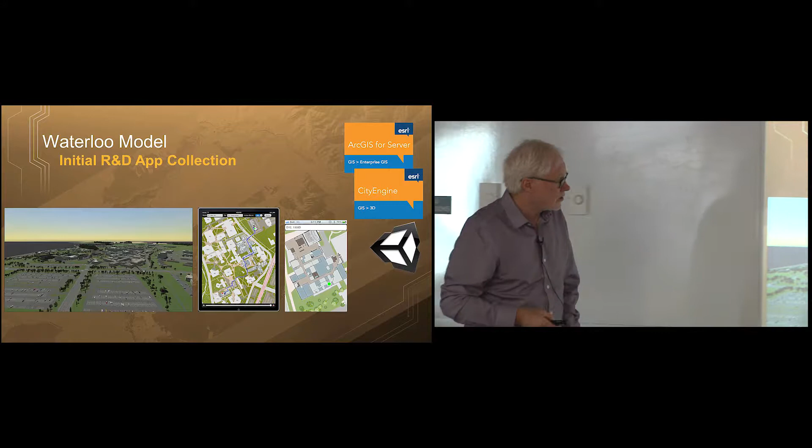So we started to experiment with CityEngine, and we've integrated it with Unity. Before we get to the York model, I just want to show you very quickly a couple of examples of some of the work we did at the University of Waterloo.

On your right over here is a native iOS application written in Objective-C that allows a user with the University of Waterloo's campus to find a room on campus. It's a very simple app - you enter a room number, the app goes off to a server-based service that identifies the location of the room that's coded into each of the floors, which are raster scanned images for every building on campus, and it shows you the location of the room and tells you exactly which building it's in, allowing you to navigate without any routing information fairly quickly. Going beyond just simply finding rooms, you need to know how to get there.

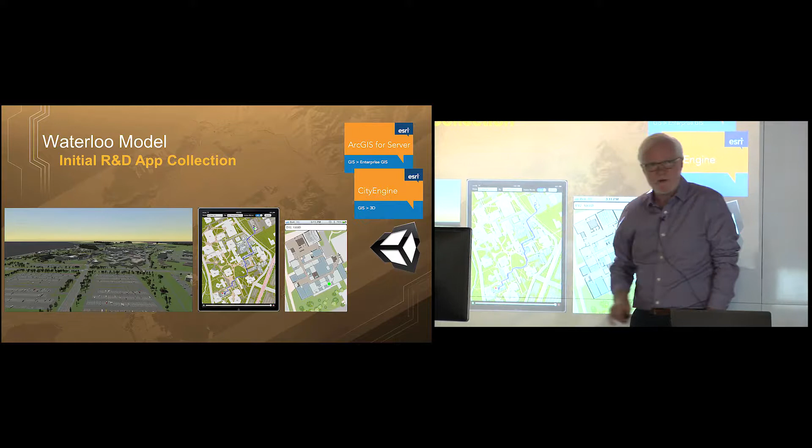So we wrote a second app that allows you to navigate—again, a native iOS app that could easily be rewritten in Java for Android devices. It takes you from the point that you start at to the point you want to get to, using both 2- and 3-dimensional routing to get there.

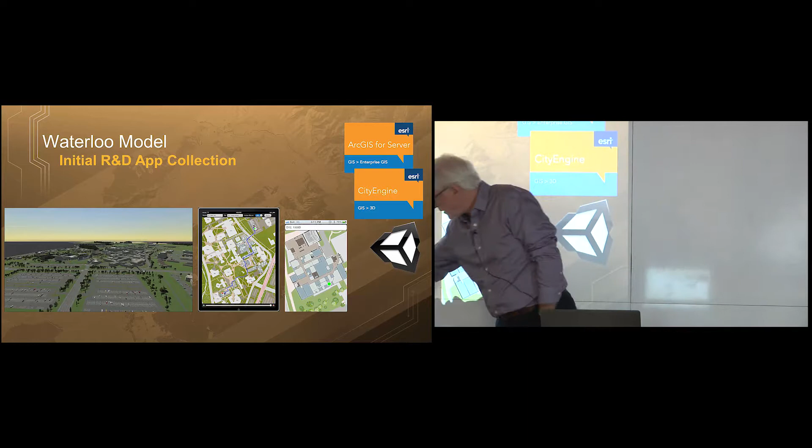So if you have to navigate between floors of a building like this, if we were starting in this room, the route would go out the door to the elevator, we'd go down in the elevator, and as we move between floors the floor plan would change according to the level we're on. Then we can navigate the path with the slider at the bottom of the device that gives us information about where we go next.

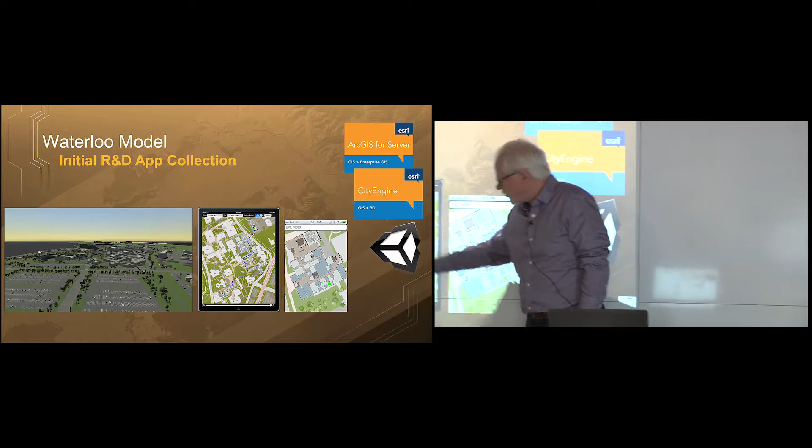And we can also set this route so that it optimizes the amount of indoor navigation we have to do if it's cold in the winter—we don't want to go outside, so we can use tunnels. Or if we want to have a nice walk, we can set it to go outdoors.

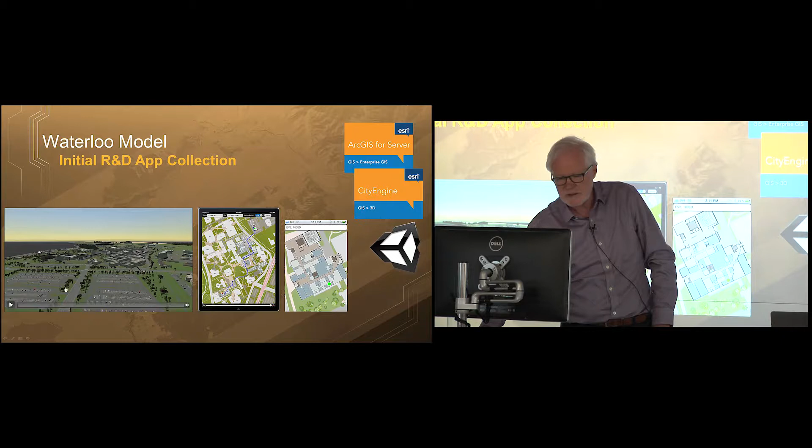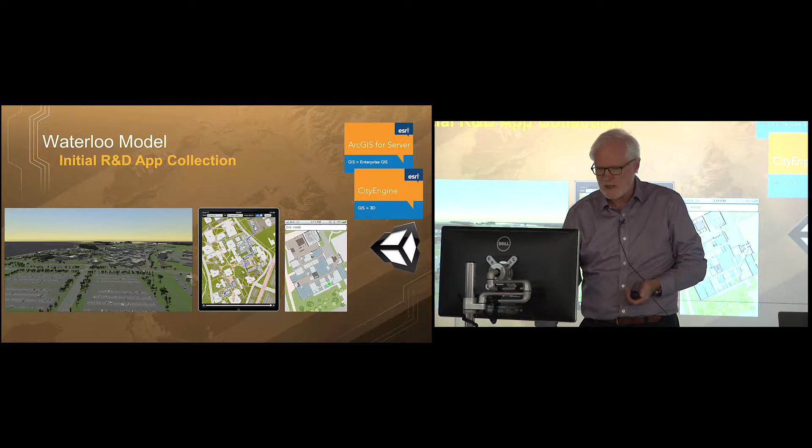And this takes you on an immersive walk through the campus during the day and at night, so you can see how we can modify interior environments in terms of lighting, and also outdoor lighting as somebody navigates around the campus when the light conditions change.

So that was the genesis of our work. We wanted to do some experimentation with the University of Waterloo, and then take what we'd learned from that and start to work with York University's campus to see what we could produce for the work that we have planned with James and Gunho.

So in the presentation today, I'm quickly going to step you through the workflow that we followed to move from some initial constructs, process them using a variety of software platforms, and ended up with a really nice semi-immersive model for York University's campus. It's a work in progress, it's not finished yet. And given that the first video didn't work, I doubt whether the last video is going to either, but hopefully you'll be able to play these yourselves.

So I'm going to step you through the process that you see on the slide behind me. So... oh, okay good. Maybe we can just show them at the end.

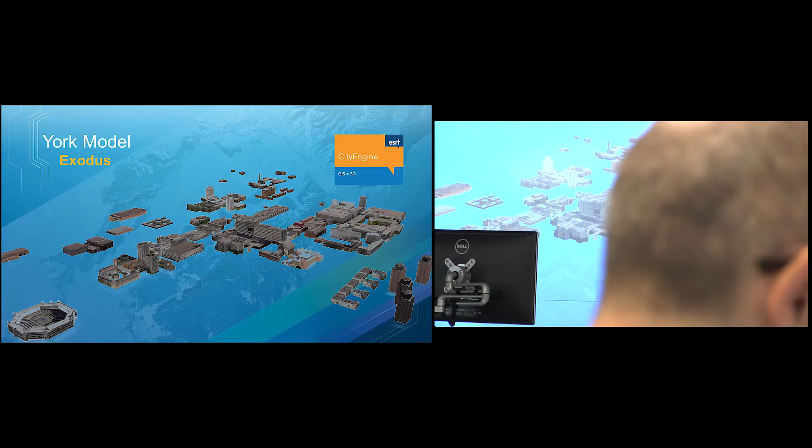So given that we started with Genesis, we're now moving to Exodus, and this is the point of departure for our work on the York campus. Gunho mentioned in his presentation a model that was developed by him and his students and James 7 years ago. And this was that model—that's the point that we started from.

And we wanted to take this model to enhance it where we could, to modernize it, to remove buildings from it that were no longer present on campus, and to add some more detailed buildings into it, as well as other characteristics that bring the campus to life. And we wanted to do this primarily in the context of this software platform, Esri's 3D modeling platform.

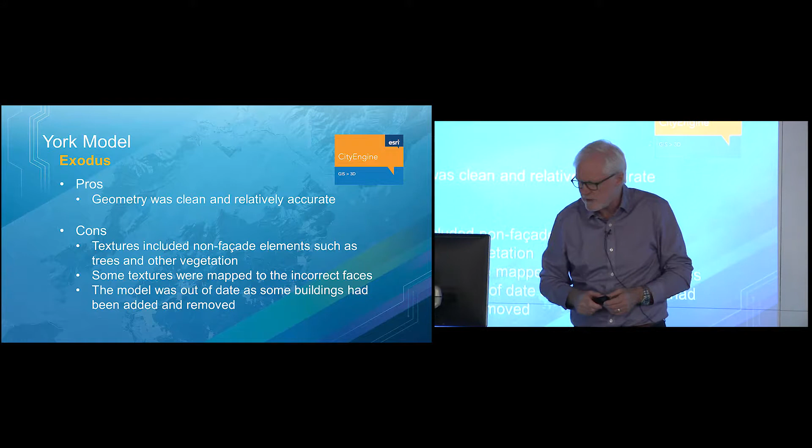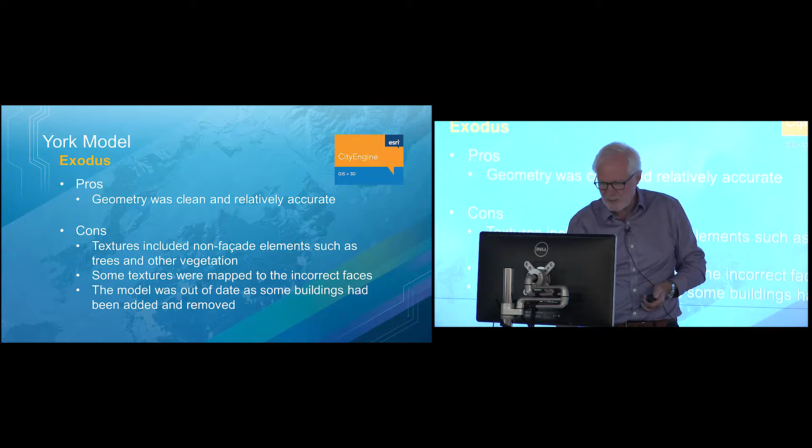So the initial model from York—the geometry was very clean, and the buildings were relatively accurate, which was good. But the textures that had been mapped to the buildings had many non-facade elements in them: trees and other characteristics mapped onto the facades, which we wanted to eventually get rid of. Some textures were mapped onto incorrect faces, and we wanted to tidy that up. Given the model was 7 years old, as you can see around you there's a lot of construction on campus, we wanted to move the buildings that were no longer there out and add much more detailed buildings in. So to do that, it kicked off a multi-part workflow.

If you're thinking of building models like this using multiple environments, you have to be prepared to be a little bit nimble and work with many different software packages, and eventually pull them all together in a common environment. So that's what we're going to step through for the next few slides.

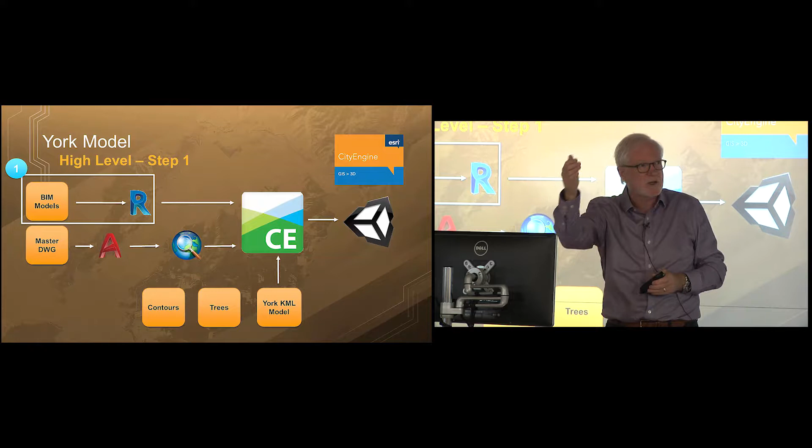One thing that characterizes our model, which is very nice, is that we have a number of building information models that are part of the overall master model. A building information model is typically produced by an architect. It contains not only the geometries of the building the architect is designing, but all of the parametric attributes relating to characteristics of the building, including furniture, light placements and light characteristics, building materials such as the exterior construction material.

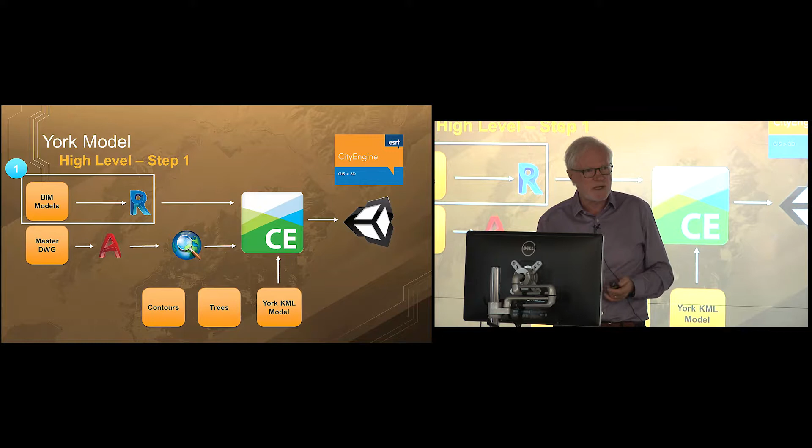And the interior construction materials of the floors and so on. BIM models tend to be highly complex and very specialized in terms of the environments they live in, which are typically CAD-oriented environments. So step number one: we were lucky in the sense that we established a good relationship with facilities management here at York, and they gave us 5 BIM models to start experimenting with and see how easy it would be to translate them into an environment we could work with.

The format the BIM models arrived in is based around something called industry foundation classes. They can have varying levels of complexity. These models have a level of detail of 5, which is one of the highest levels of detail a BIM model can carry. And given that they were developed in Revit, which is Autodesk's BIM environment, we had to move them from Revit into a format that we could read into CityEngine.

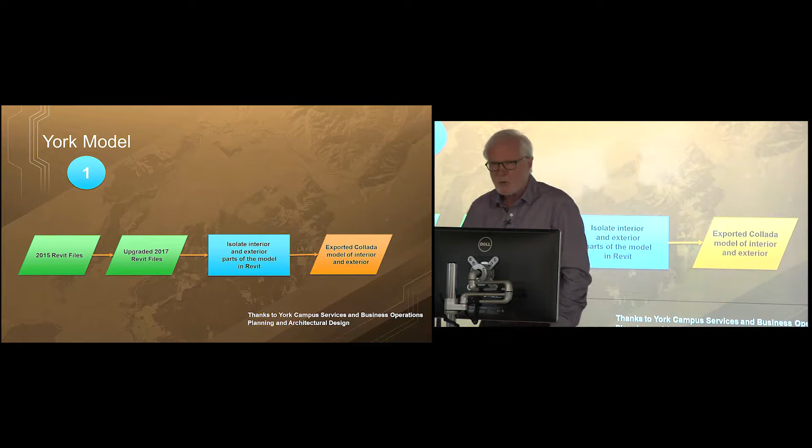Initially we converted the 2015 Revit files to Revit 2017 format, which is what we were using. We isolated the interior and exterior of the buildings, so we could include just the shells, but also the interior construction and detail of each building if we wanted to. Then we exported those to Collada format so we could import them into CityEngine. So it's a simple process, but it actually required quite a lot of work.

And this is the result of this process. Here is one of the buildings, and given that we're not in presentation mode, I can't remember the name of the building, but perhaps you guys could. You live at York, you don't know the building? That's not good. Anyway, it's one of the newer buildings on campus, and I just didn't write it down, so I can't remember what it is.

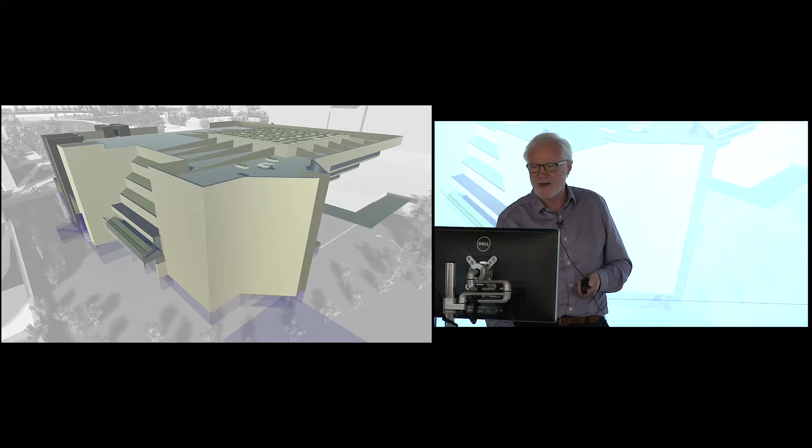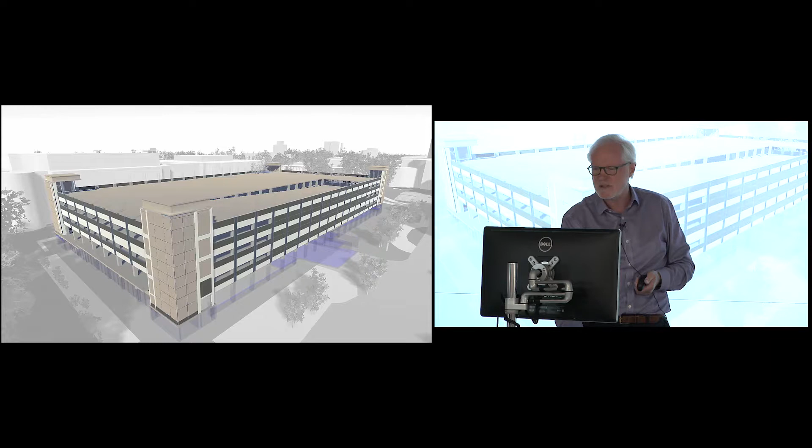This building here is, I think, the parking garage that I parked in this morning, just across the road from us. So that was the second BIM model we had. I think this is the life sciences building. And again, we have not only the exteriors but also the interiors of these buildings modeled. Around the building, we have the construction that came from the 7-year-old KML files built for Gunho's 3D Town project.

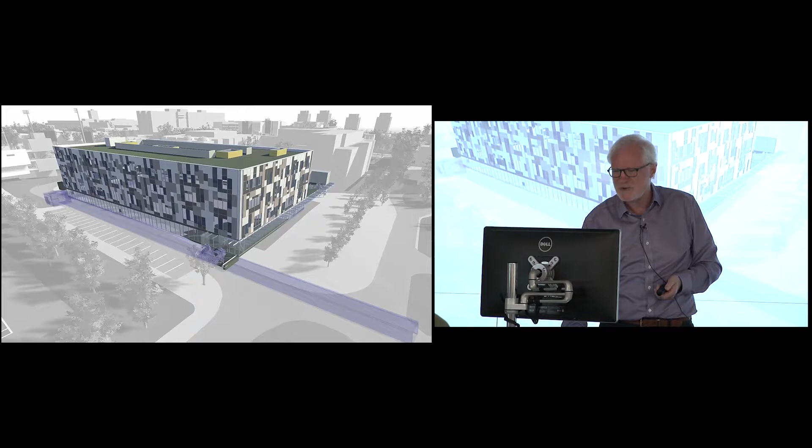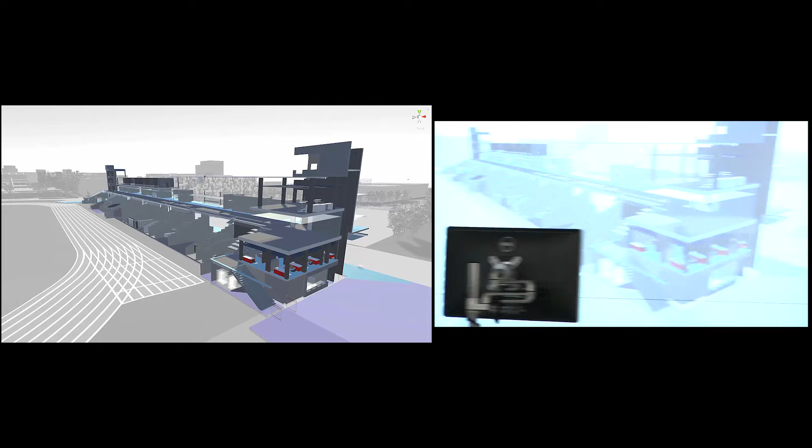This is the Pan Am Stadium, and as I said, we could differentiate between the exterior of the building, and as we peel that away, we can see the interior right down to the level of individual desks and chairs. There's much more information within that model than I'm showing, and I could show even more detailed information still. And finally, we have the building we're in at the moment, and it's actually a fantastic building information model construction. This is the exterior of the building.

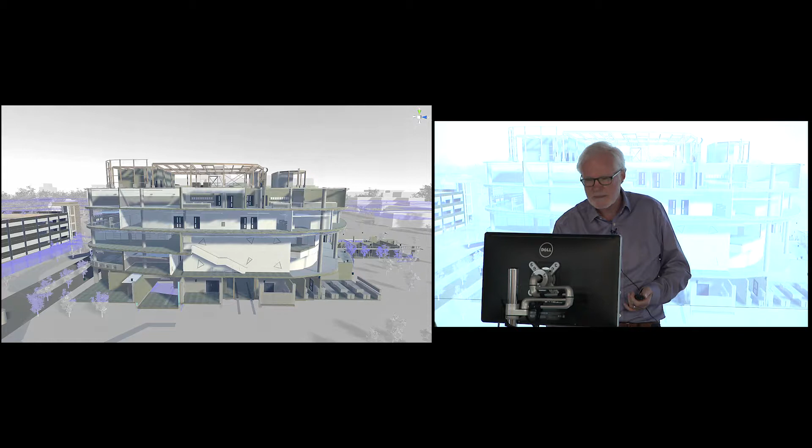We peel that away. I actually think we're in one of these, maybe in one of these—I don't know where we are in the building, but we could find ourselves if we wanted to easily enough. So you can see the interior construction of the building, and of course we can move anywhere within that internal space that we want to. So that constituted step one: getting the BIM content out of Revit into Collada and into CityEngine so we could model it within this immersive environment.

Secondly, we needed to create context and texture for the environment outside the buildings primarily, and we could do that in a couple of ways.

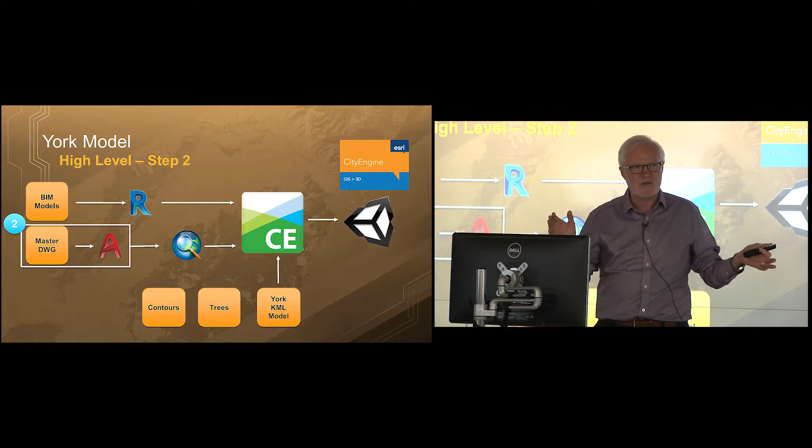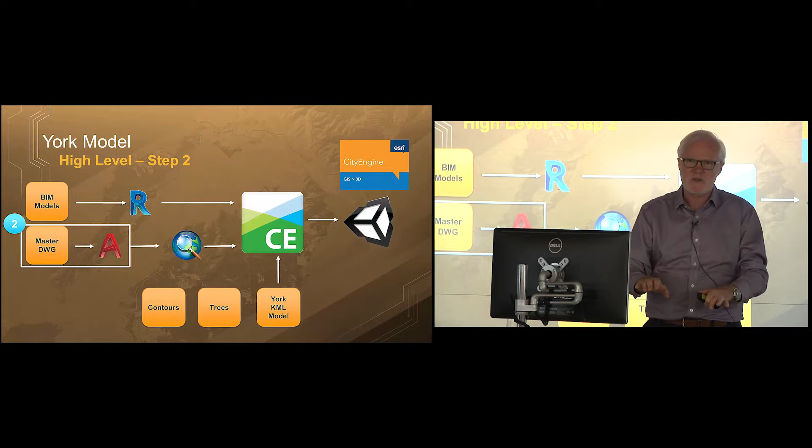The first step was to take a large AutoCAD file that facilities management had for all of the buildings on campus, plus all of the trees, street furniture, light fixtures, roads, walkways and so on. We took that large, overly complex AutoCAD file and needed to clean it up.

The steps we followed: first we selected the relevant components of the CAD file within Autodesk software, not in the GIS world yet. Remember, these Autodesk files have no knowledge about anything other than each line knows only that it's a line. It doesn't know what it's connected to, or where it is with respect to the building or the surrounding environment geographically.

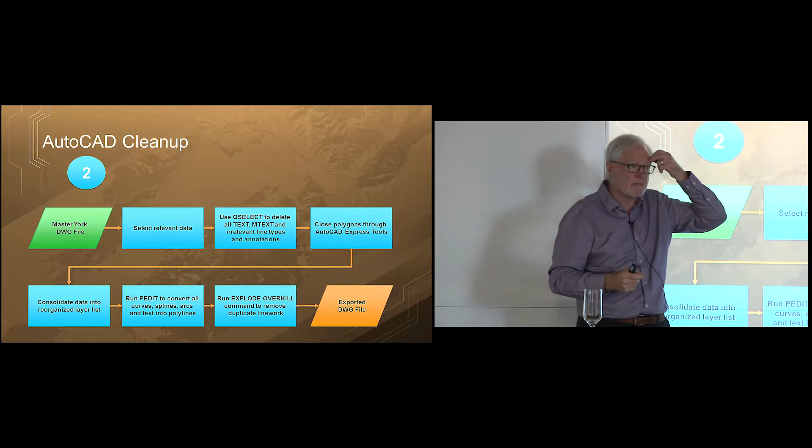So we selected the data we were interested in, removed irrelevant line types and annotations, and closed polygons that represented things like distinct land use types. We consolidated the data into a reorganized layer list relevant to us, then ran tools within Autodesk to tidy up curves and splines, converting them into polylines that Esri's desktop software could read.

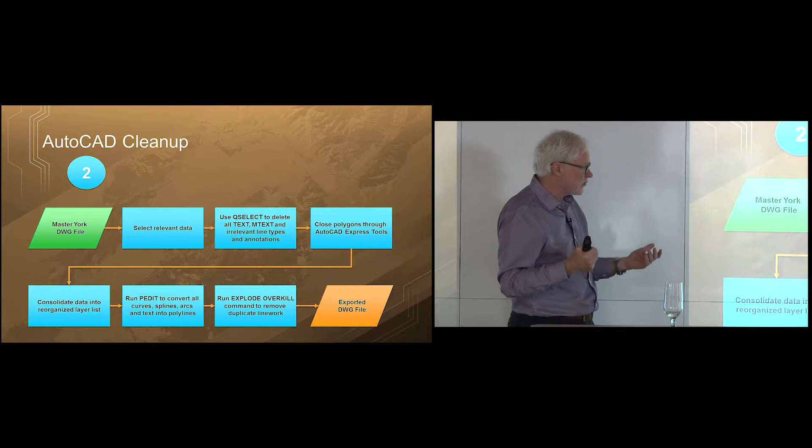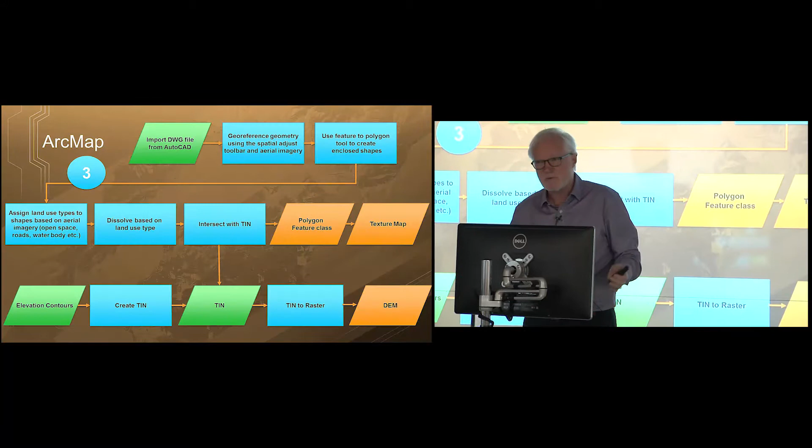We then ran an explode overkill command to remove duplicate line work and exported that into a DWG, an Autodesk drawing file we could read into ArcGIS Desktop. So we come to step three, where the GIS world takes over from the CAD world. This is where Esri's tools jump to life.

This is quite a complex flow here. I won't work through it in detail given our time, but we took the file from AutoCAD — it was actually a native DWG file rather than a DXF export — and we georeferenced it, so it knew where it was on the Earth's surface.

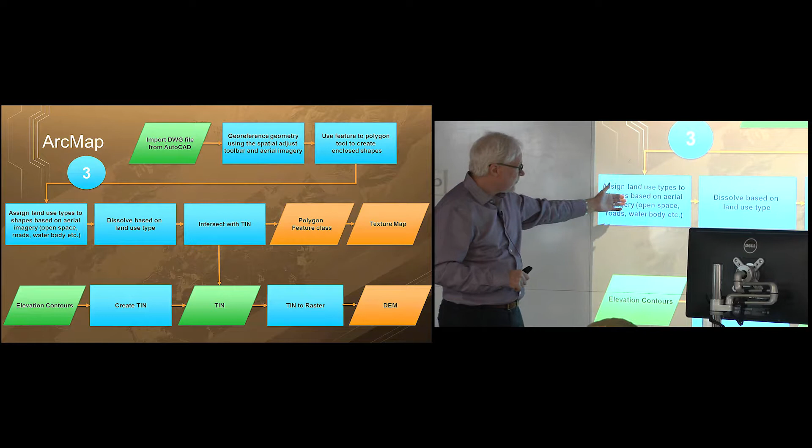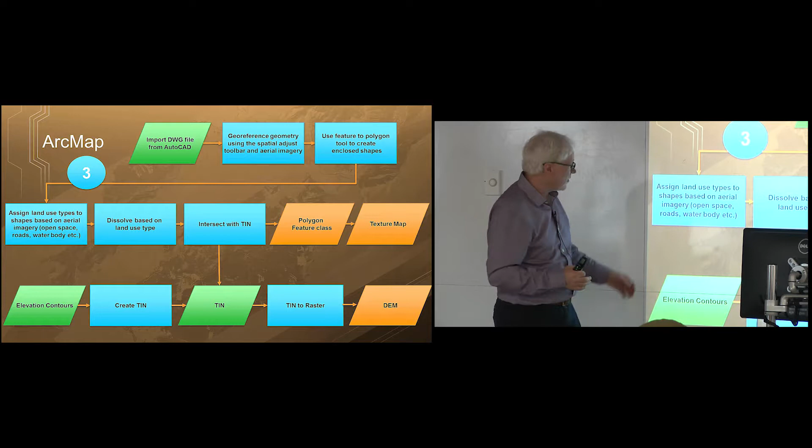We did further processing to identify land uses and land use types relevant for the overall York model, coding these according to what exists on the ground, using aerial imagery to identify those land use classes. We then generated, in this process, a TIN from contours.

Does anyone know what TIN stands for? It stands for Triangulated Irregular Network. What it does is take elevation points and triangulate them — each point has a value of the Z height above the ground. The denser the TIN, the more accurate the terrain.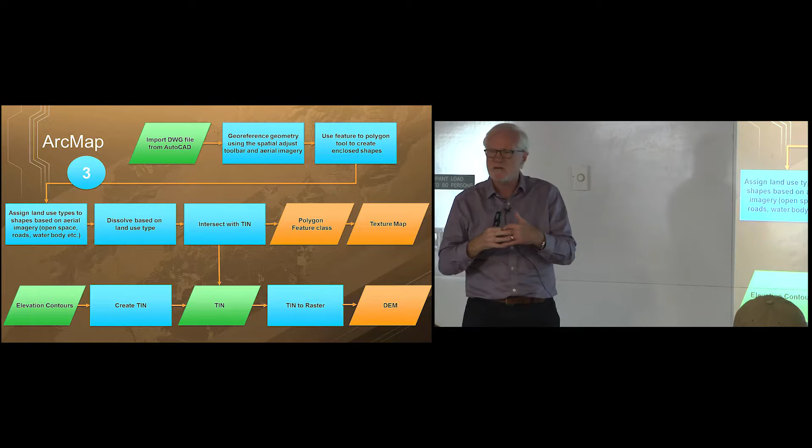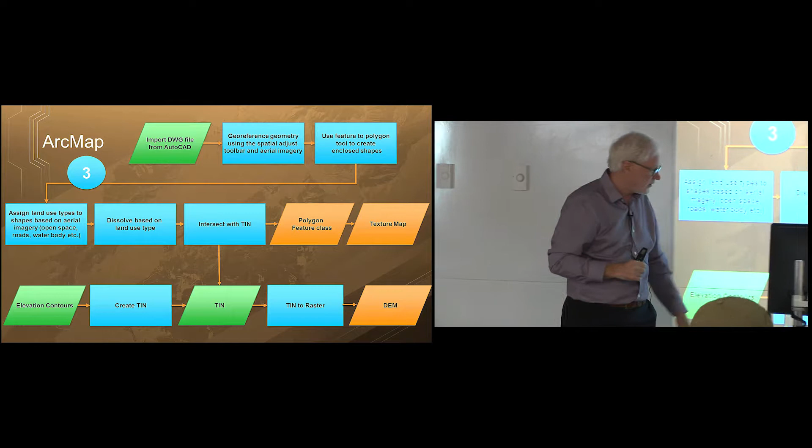So we took contours, generated points from the contour lines, and built a TIN from those points so we had an initial terrain surface for the campus. We then intersected all of the land uses with the TIN, so everything knew where it was on the surface of the Earth, and ran a process called tin to raster.

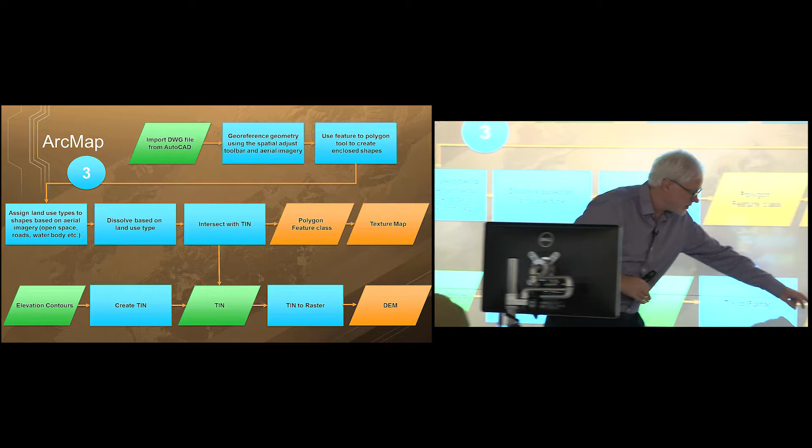We moved the vector-based triangulated irregular network to a grid so we could produce a digital elevation model — a dense grid cell-based structure of the terrain with a height associated with each pixel on the elevation mesh. At the end of this process we had a texture-based map of land use classes, including roads and so on, and a very good elevation model to start placing everything onto.

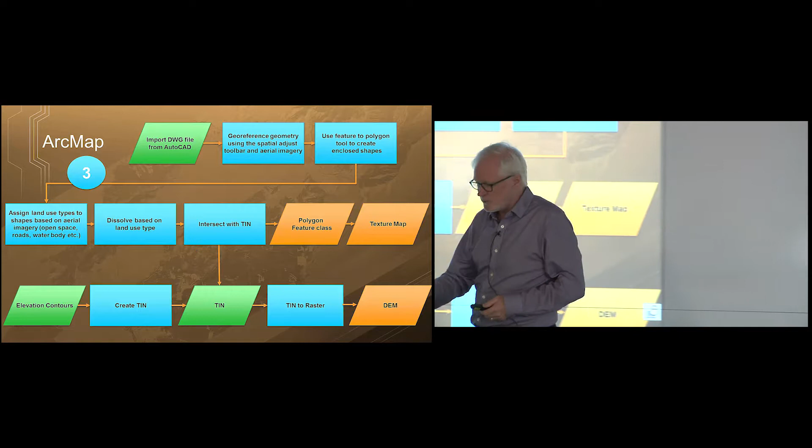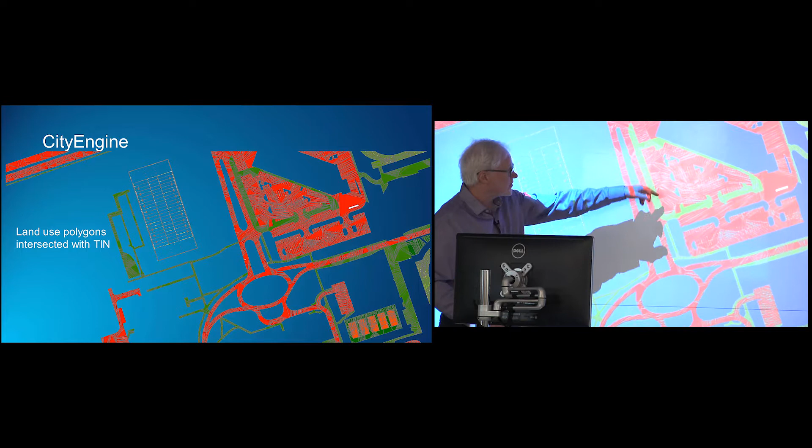I'll just quickly step through this. This is an intersection of the TIN — you can see the triangles underlying the land use classes, and on top some land use classes identified: a parking lot, some other buildings. That red square is roughly the area the previous slide came from.

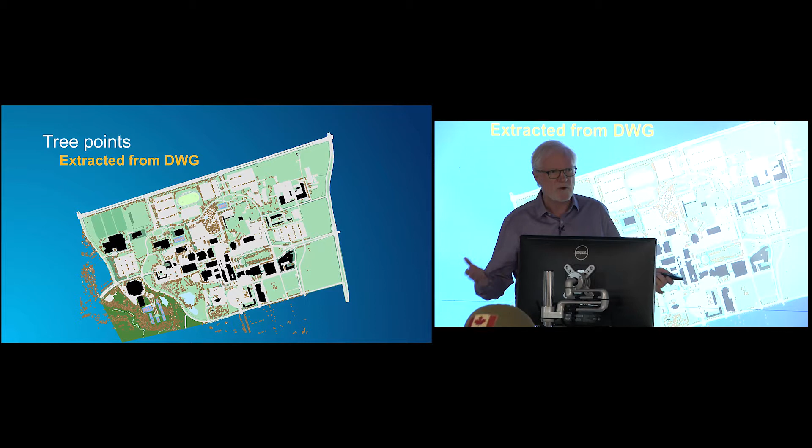We then had the land use classes coded from the CAD file and use of ortho imagery. We had light posts extracted from the AutoCAD file so we could create outdoor lighting and build models of the light fixtures outside on campus. To add context to the model, we had all of the tree locations on campus. So we're just about ready, but not quite.

We've got everything to the point where we want it — which is into CityEngine, Esri's 3D modelling environment.

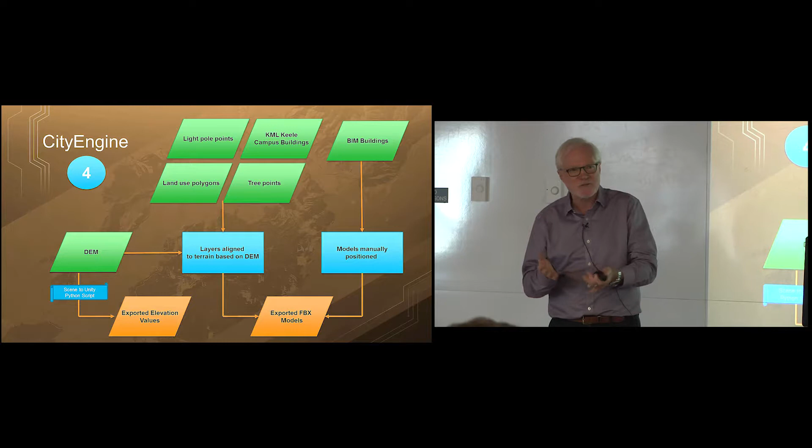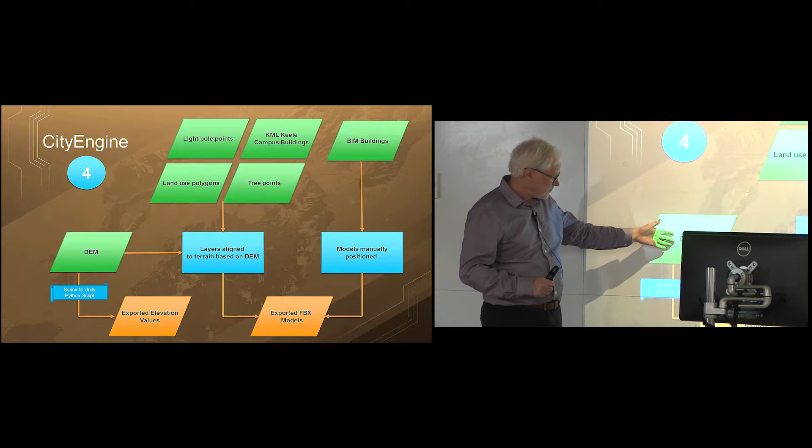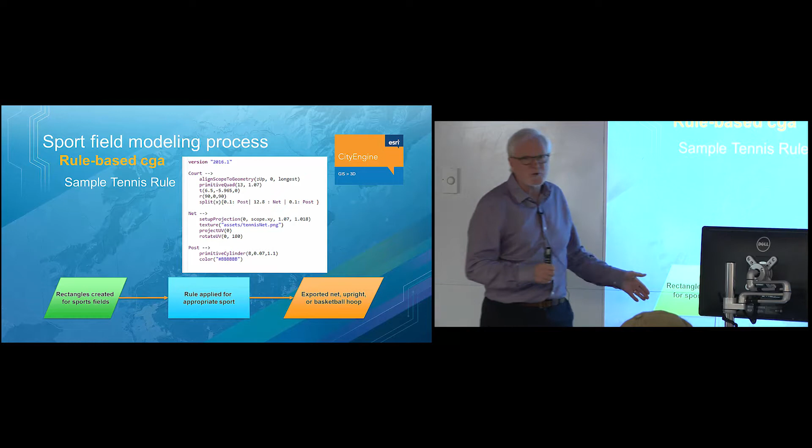We wanted to add detail to the model, and in particular run some rules that generated things like tennis courts, basketball courts, parking lot lines, the football field, and so on. These pieces of the model were all built procedurally using CGA scripting, computer-generated architecture, which is the rule-based system that City Engine uses for construction.

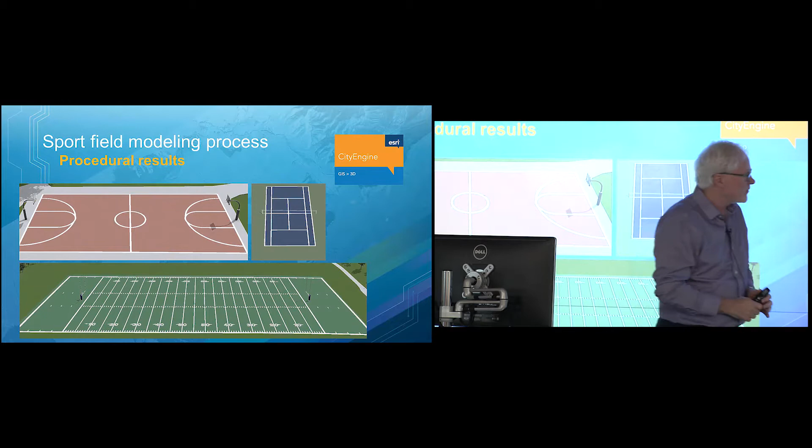Here I'm building a tennis court that's constructed of a court, a net, and a post at each end of the net to hold it up. So that's the rule set for building the tennis courts, essentially. At the end of that, we have basketball courts, tennis courts, and the football field with posts and markings to add context to the model.

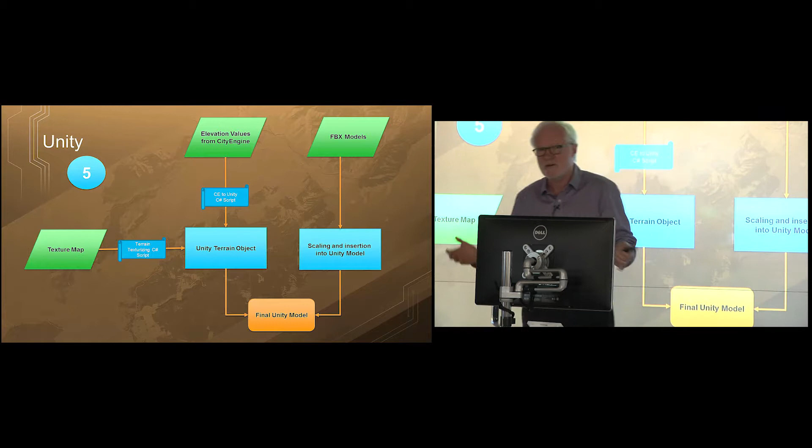So we're just about there. We're at the last step now, which is the model's in City Engine. We've added context to it. We now want to build that into Unity, the gaming engine, for animation and further detail on the model.

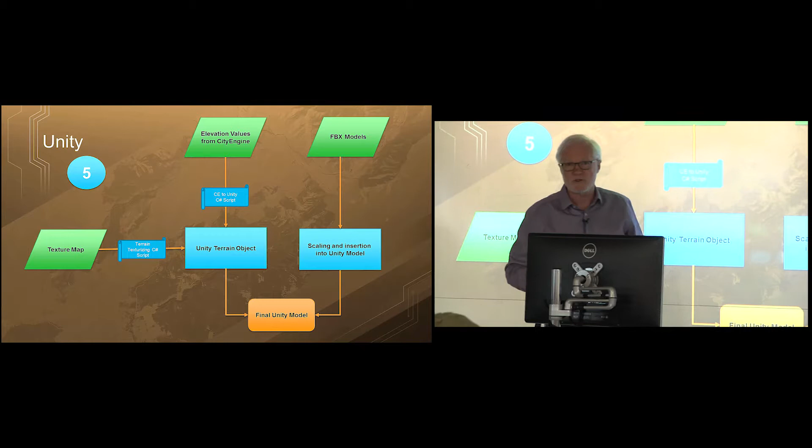We took the elevation from City Engine and wrote a script in C# to build a terrain object for Unity. We took the FBX models, the output of the buildings and so on from City Engine, scaled those and inserted them into Unity. We took the texture map, wrote another C# script to process that, and ended up with the final Unity model.

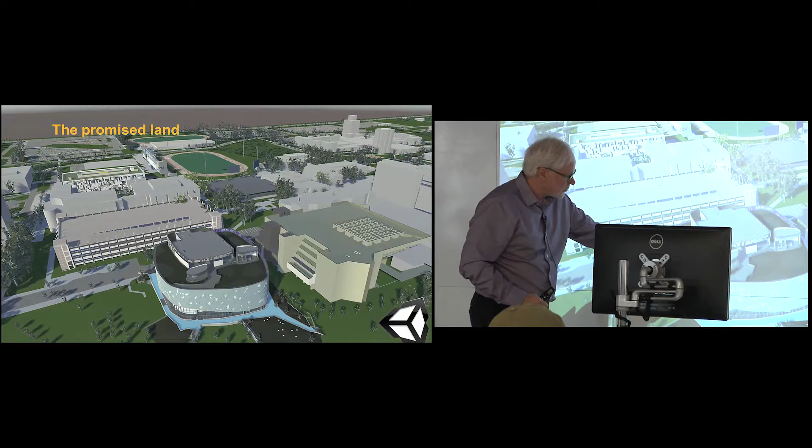And so Genesis, Exodus, now we're at the Promised Land, which is the final model of the campus here at York University. You can see the BIM models in the scene: there's the Bergeron building, there's the parking garage. I think that's student life sciences, yep. And this other one that we don't have a name for yet—somebody will tell me what it is eventually.

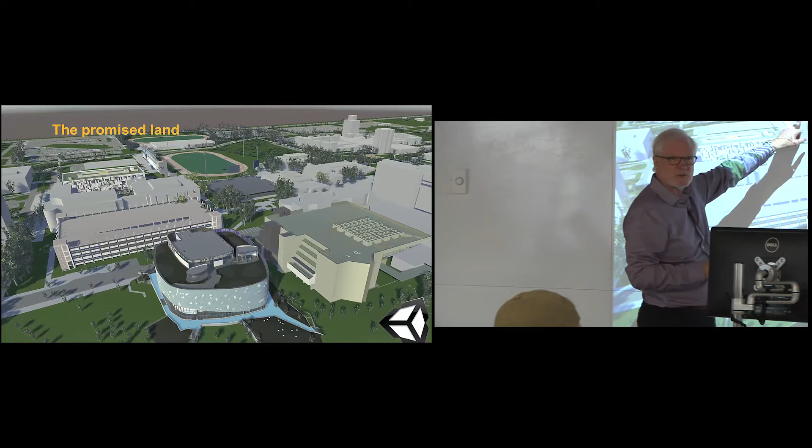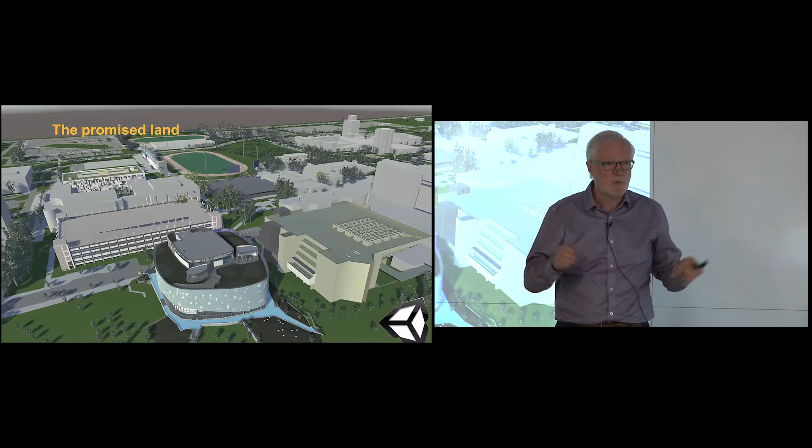You can see the trees on campus, and we've got the Pan Am Stadium as well in the scene. So we have 5 BIM models included. We don't have any textures mapped to the buildings yet—that's a further stage of work, and doing that texture mapping will really make this model jump to life.

And if this machine worked—and it's not going to—there's a video there that would take you on a fly through the model. We're not quite finished yet. One very quick point is that this BIM model...

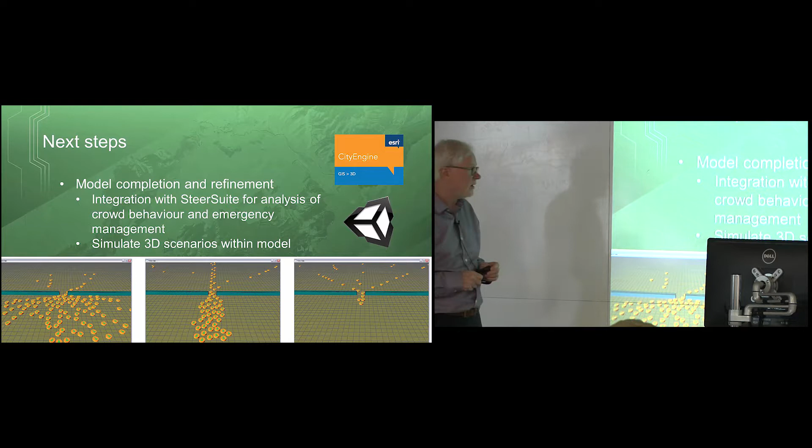inspired and CityEngine created model that now sits in Unity is really just the start of the work we're going to be doing with James and Petros, whom you're going to be hearing from a little bit later today. In the sense that we now want to use this model to do things with it.

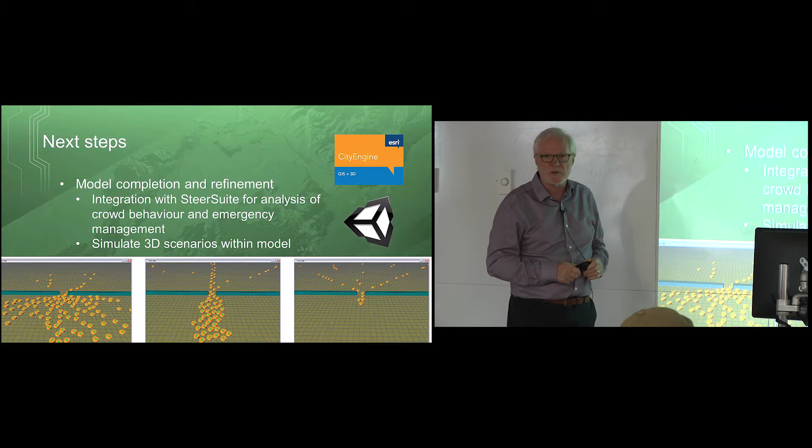In particular, we're interested in crowd management: how do people move around within buildings and move between buildings on the campus? To do that, we're going to integrate our model with a software package called SteerSuite that models the behavior of individuals and crowds in 2- and 3-dimensional space. So that really represents the next step of our work.

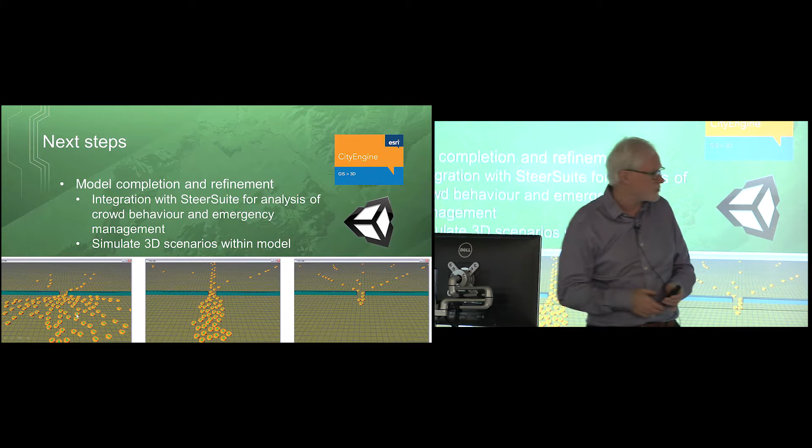You can see these agents in the screen capture below in SteerSuite moving through. If this was animated, you would see these objects or agents moving through the gap in the wall until everybody gets onto the other side.

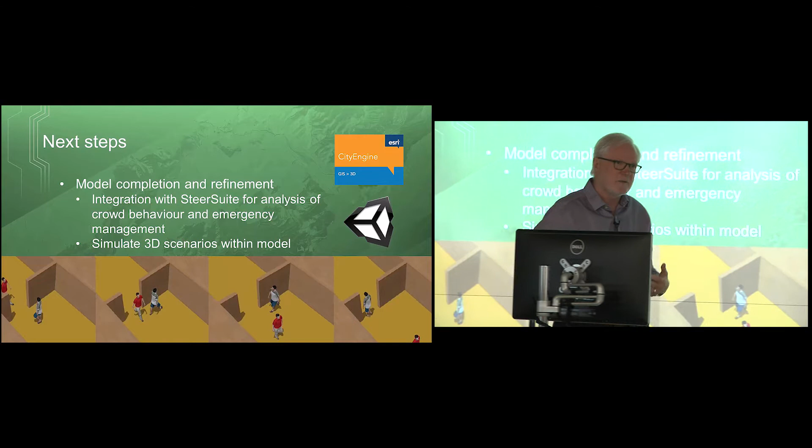You can actually take SteerSuite outputs now and model and render these movements of people within 3-dimensional space using 3-dimensional avatars of individuals, and that will really bring our model to life. The other thing you don't see in this, it's very inanimate. It's just buildings, trees, things. There's no people.

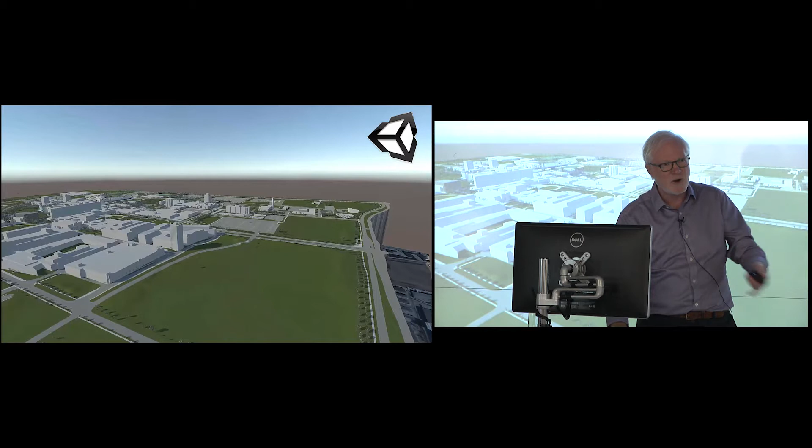But we can insert people very quickly into this model. We can insert cars, we can insert TTC buses, and animate whatever we want within this gaming engine that we're now living in, with the model that had a long development process, but now that it's there, there's a ton of stuff you can do with it.

Do I have 2 minutes, James, or I'm done? Let's just...

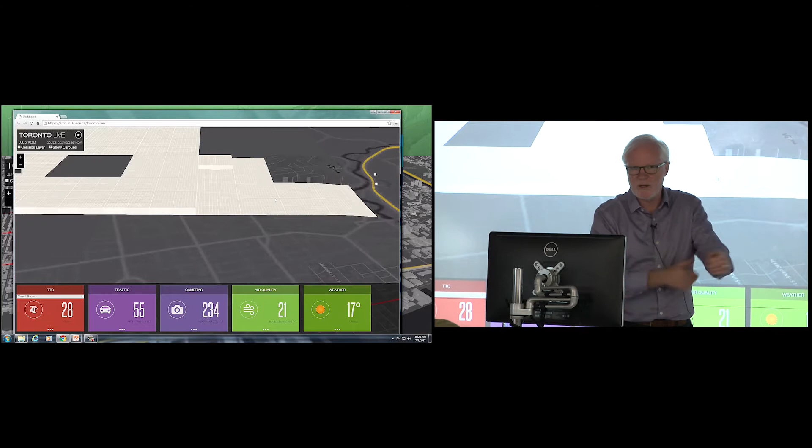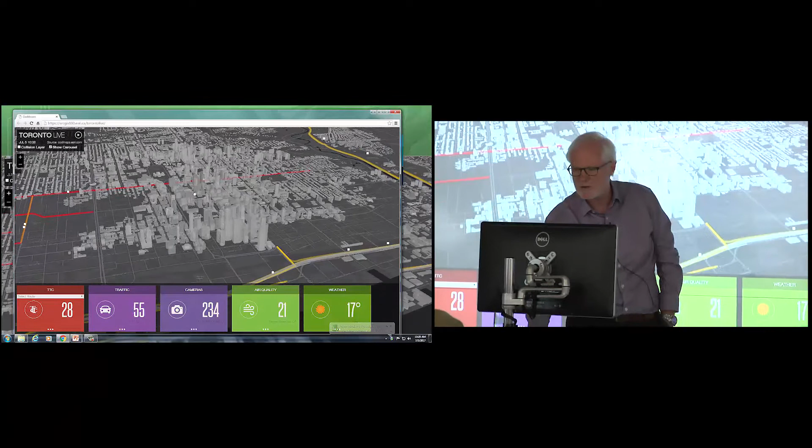The little agents that you can see hopping around the road is a live feed coming from the streets that have Bluetooth and Wi-Fi sensors on the streets that are monitoring traffic in real time.

If we click on the carousel at the bottom for traffic, you can see these purple identification points pop open. If I click on one of those, it'll tell us what the speed at that location is. It gives us a sense of how fast the traffic is moving, what's congested and what's moving well within this model.

We can also click on all of the traffic cams within the City of Toronto. So if I want to go to a traffic cam, that'll show me what's happening at that point. This is updated every 5 minutes, live on the web. And remember, we've got the 3D buildings in the background here.

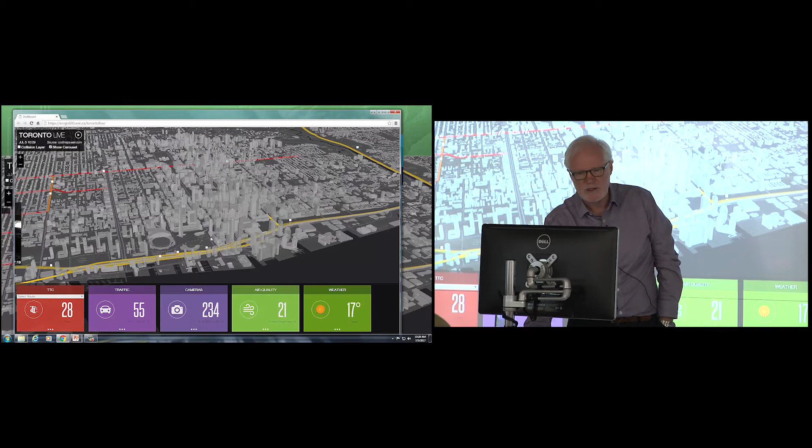So if we wanted to scroll up, and I won't show you this right now, but we actually do have York's campus in another version of this, the model that I just showed you. So actually, this is York's campus right here at the north end of the city.

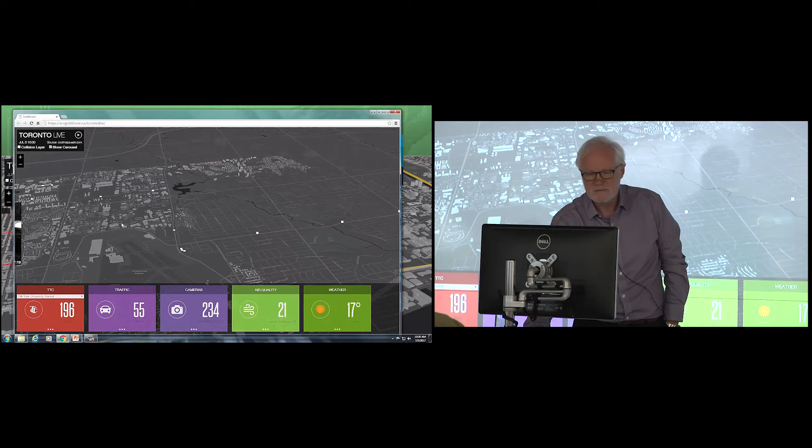If we want to, we can choose a TTC bus route from this. What's Keele, I think, is 196. I don't know whether... 196. There it is there. So if I click on that, that's the route.

And the buses actually move, these little white dots, that's real-time data coming from the TTC at the moment. And so if I click on one of the locations, it tells me how long the wait time is until the next bus arrives.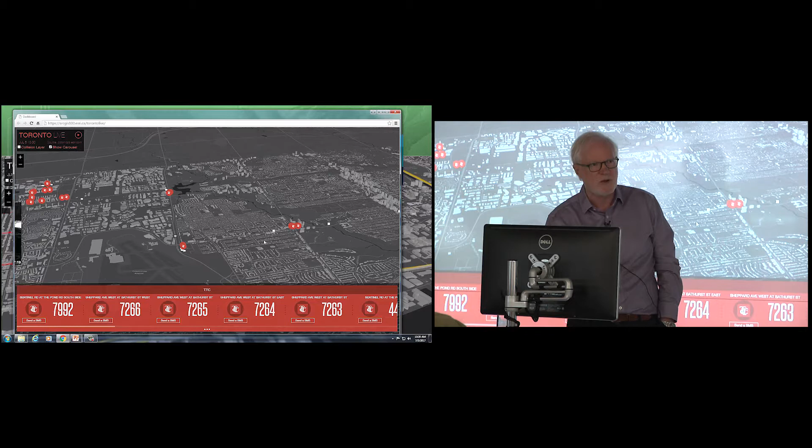The other thing that's nice about this is we added some data from Vision Zero. This is of interest to the ISUM project. This is the location of every accident in Toronto since 2006 where there's been a fatality or a serious injury. So it gives us the time of day that this happened, the location, the nature of the accident.

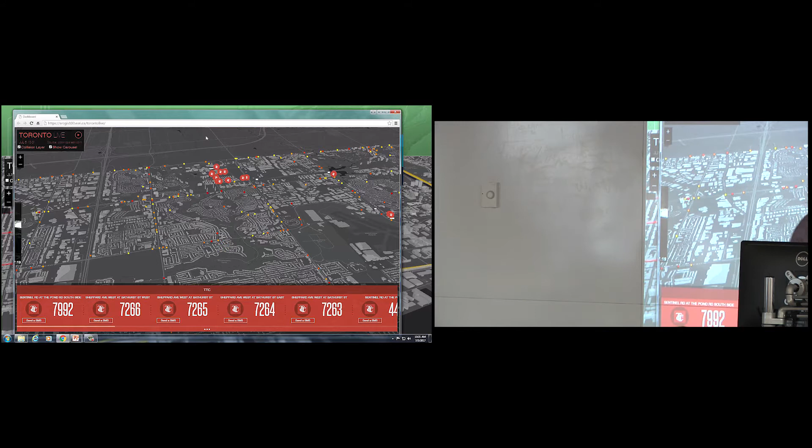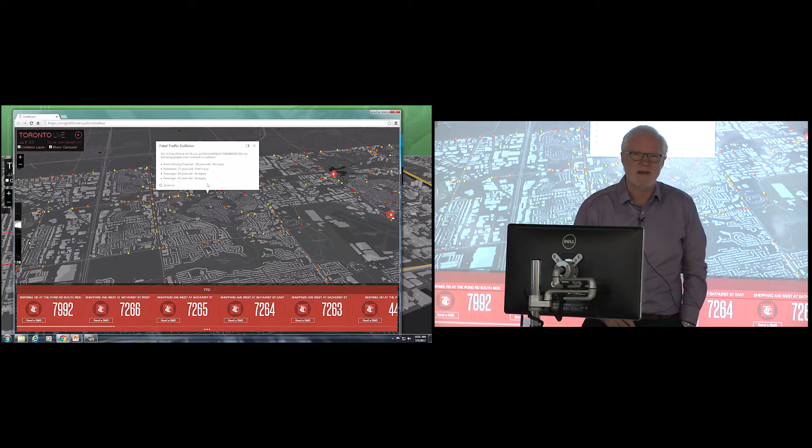If we just click on randomly one of these points. So there we are. It was a fatal traffic collision. A 78-year-old driver, a pedestrian 71 years old got hit, and there were a couple of passengers in the car who had no injury.

So this sort of information, and if we want to get rid of the carousel, we can just simply click on that tab there. But we have another version, as I said, that has the actual model from York in here. So this, I think, provides us with a great basis for the ISUM work.

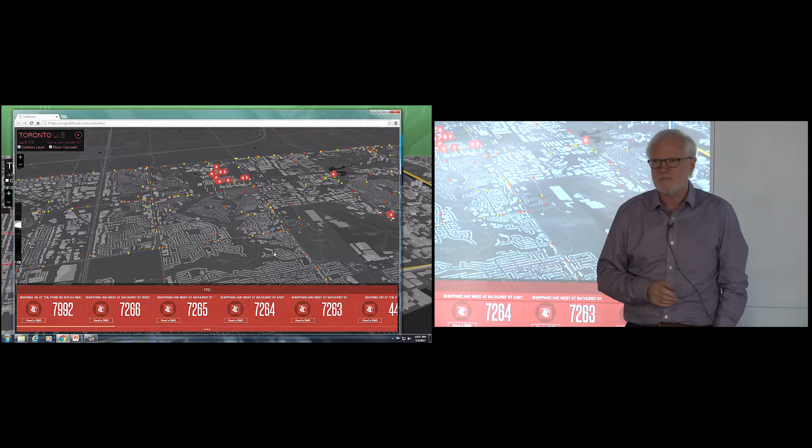Yeah, so I'm happy to answer any questions. We don't have time for the videos, but the UW one's really very interesting—it's day and night. And the York fly-through is a little less interesting, but still quite impressive.

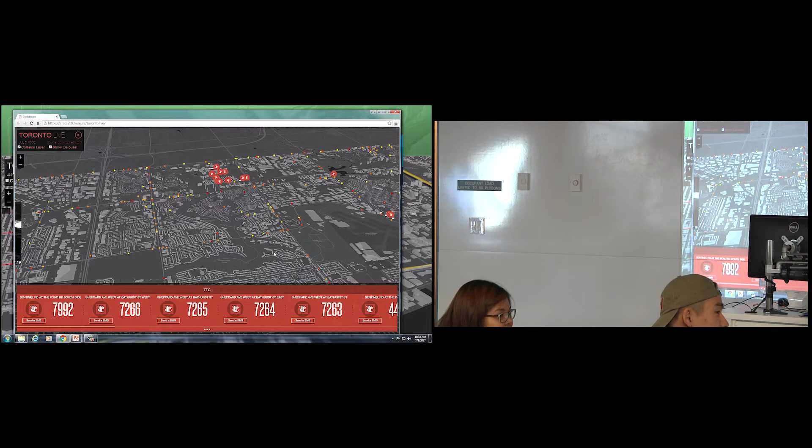How do you convert from having data about scenery and buildings and whatever to where the roads actually are, the pathways and the hallways? Well, the nice thing about moving the CAD data and all of the other data into the GIS environment is that everything is geo-registered in real-world coordinate space.

Once you know where a tree point is with the XY coordinate, which is in a real-world projection rather than just a random 0,0 base, you know exactly where that tree is, but you also know what's around it because everything else is geo-registered. So if a particular tree on campus is causing issues with shade falling across something, we could find out what features are affected by the shade, depending on sun angle, and do something about the tree.

So everything in this model is converted from table coordinates or computer coordinates to real-world coordinates, and that allows us to integrate everything together within a common coordinate space. So those models contain information on what objects are.

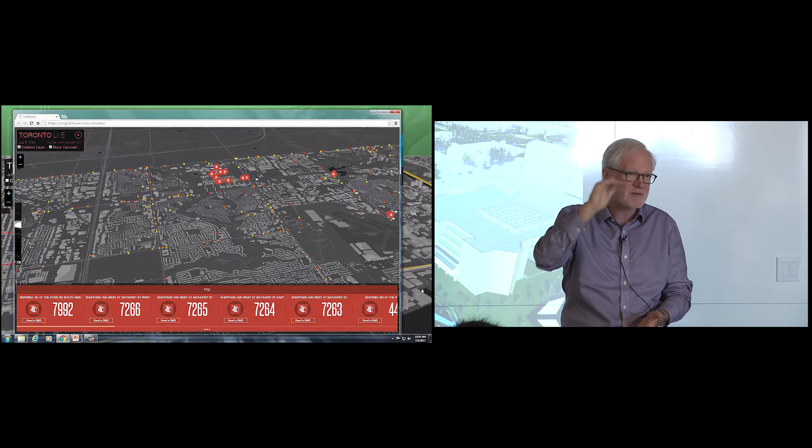It says here's something, and that's a tree - not only a tree, it's an ash tree, or it's a cedar tree. In City Engine, we have three-dimensional models for about 200 or 300 different tree species. So we can model the tree not only according to what type it is, but what height it is, when it was planted, when it was last maintained or trimmed by anybody. There's a rich database behind every single feature.

And in the BIM models, the information's extensive. It's incredible, because every item in a BIM model carries attributes with it, like the lux on the type of lights that are in rooms. So yeah, it provides us with a great environment to model in.

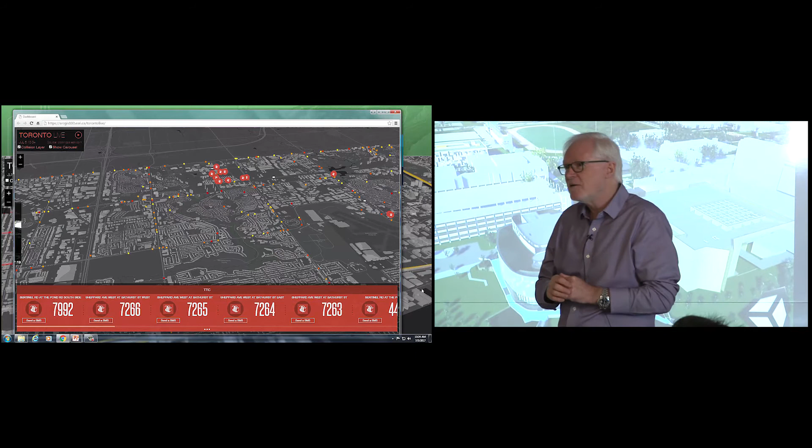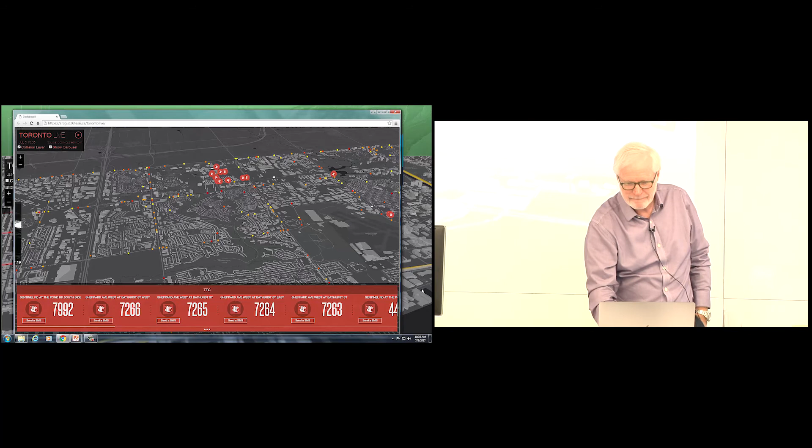I was just wondering how difficult it was to use different types of files in different software - how difficult it was to convert from ArcGIS. That's a good question. It wasn't easy, let me put it that way. There was a lot of experimentation involved.

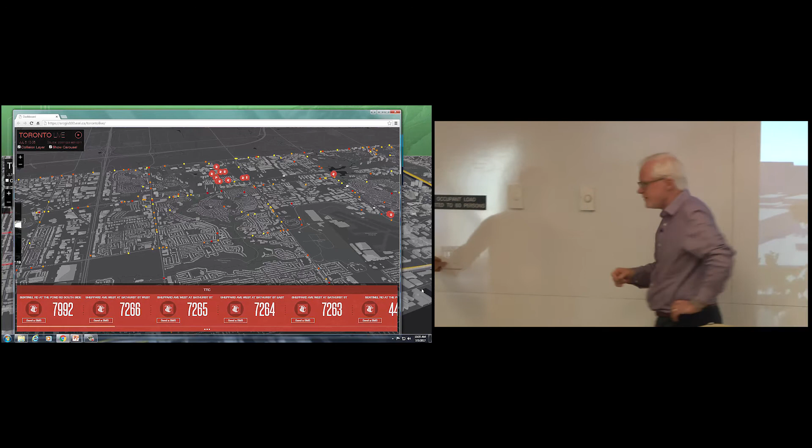We're just flying through the York model now, and maybe if we can just dim the lights. There was a lot of experimentation involved, but virtually every software environment has export formats that can be read by other packages. Where we didn't have out-of-the-box export functionality, we relied on a piece of software that's a really great tool, called FME, produced by a company called Safe Software. That provides you with translators of just about any format to every other format.

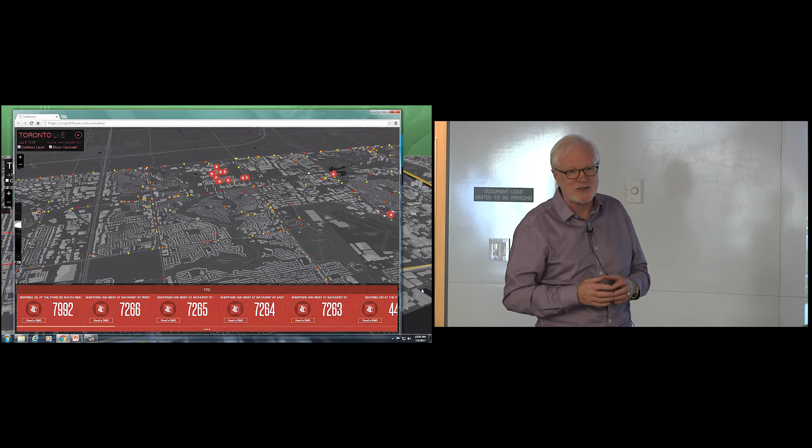I don't know whether it's site licensed here at York, but we have an extension with Esri software called the Interoperability Extension for ArcGIS, and that allows us to move between formats pretty transparently. I don't know whether that answers that or not.

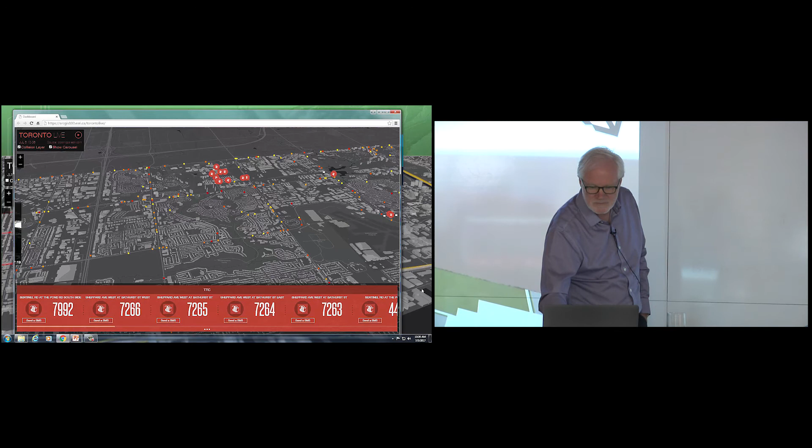So you talked about adding texture onto your three-dimensional models later - how are you planning on collecting that data, or is it already available to you? We don't have any textures on the buildings at the moment. That's a good question, and that's the most difficult part of the whole process.

Possibly crowdsourcing? We could do that. We could simply texture these buildings using out-of-the-box City Engine textures that wouldn't necessarily reflect exactly what's on the building, but it would be a close facsimile to it.

One thing we hope to do is build a library of textures that could be crowdsourced, so somebody can take a photograph of the side of a building and upload it to this library on GitHub. And if somebody wants a texture type, they can take it and apply it to whatever they want to use it for.

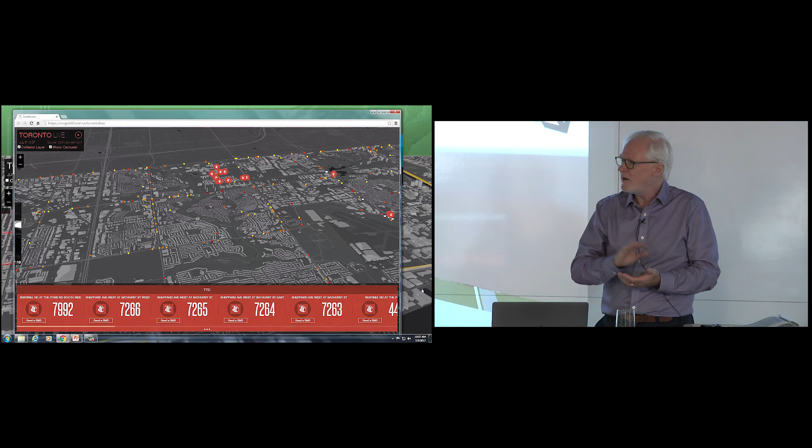One of the good things about getting the model out of City Engine into Unity is the texturing rendering within Unity is much richer than it is within City Engine, which is a tool for building things, not texturing them. In Unity, you can texture water and grass and terrain much more realistically than in any other environment that I'm aware of.